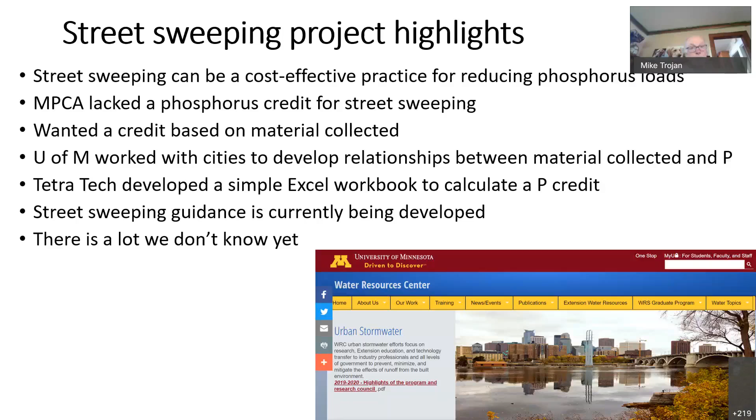So with that, I'm going to introduce Randy Neprash for a couple minutes. Randy is a PE, and he was a staff person for the Minnesota Cities Stormwater Coalition. He's recently stepped away from that so that he can do more work. He's a founder and currently a vice chair of the National Municipal Stormwater Alliance. It's an organization comprised of state and regional coalitions of MS4 permittees. He is also a stormwater regulatory specialist with Stantec.

So Carly, if we could pass, I'll stop sharing. If we could pass the ball to Randy and let Randy go. All right, Randy, you should be all set. Okay.

Excellent. Thanks, Mike. I'm Randy Neprash. I am coming to you from the Twin Cities in Minnesota. I am with Stantec, the Minnesota Cities Stormwater Coalition, and the National Municipal Stormwater Alliance. What's going to be talked about today and this work on street sweeping is potentially hugely important for MS4 permitted cities and other entities around the country. We're focused on phosphorus in this presentation and in this work. It's the nutrient we chase here in Minnesota.

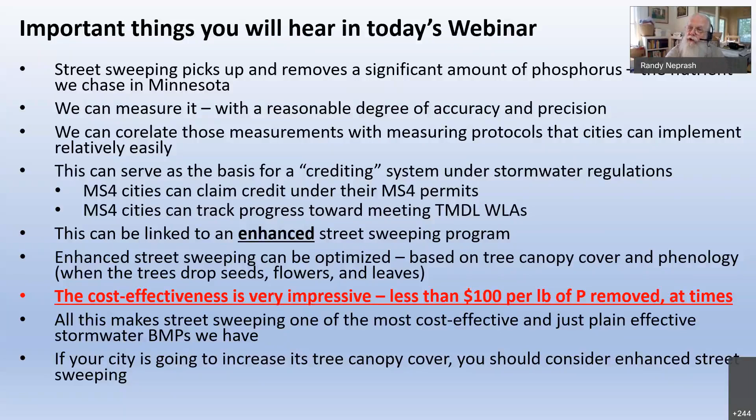The cost effectiveness here is really quite amazing. At certain times of the year, we're picking up phosphorus at less than $100 a pound, total cost. That's headline news. All of that makes street sweeping one of the most cost-effective and just plain effective stormwater BMPs we have. And if your city is going to increase its tree canopy cover, you need to consider this because you've got to address the increased phosphorus from more leaves.

So if you are an MS4 city, or if you're running an MS4 program, you should consider this for your city or your program. Have your state recognize this work and create a crediting program. You can incorporate street sweeping into your local stormwater program that makes stormwater funding available for buying street sweepers or operating street sweepers. You should get the tree canopy cover data for your city.

You should optimize your street sweeping routes. You should quantify the results and benefits from your sweeping work. And you can find all this information in the Minnesota Stormwater Manual. Can't recommend it more highly. Where there's going to be talk about the work that's left to be done, and it's considerable.

We should be looking next at street sweeping and trash instead of just nutrients. We should look at sweeping and solids. We should look at the impact of enhanced street sweeping on downstream stormwater BMPs, rain gardens, ponds, etc. We should be thinking of streets not as just sources of pollutants, but as useful collectors of pollutants where we can relatively easily pick them up and remove them. Then the next thing is we should look at all the other leaves that we have in our systems.

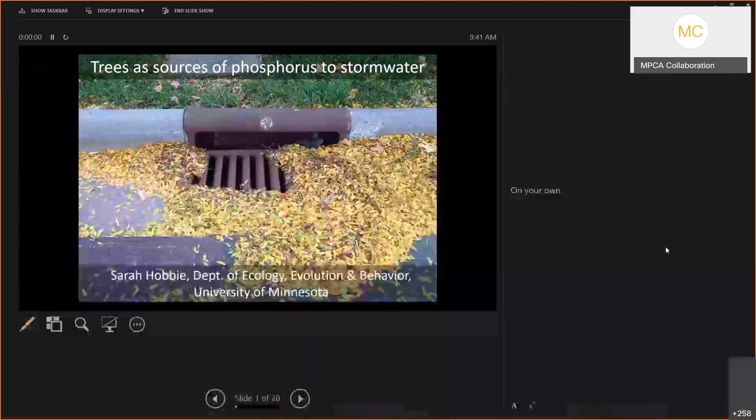All right, perfect. So Mike asked me to kind of set the stage today and talk about trees as sources of phosphorus to stormwater. Next slide. So I just wanted to remind people of the potential sources of phosphorus to streets and stormwater. Those include atmospheric deposition, which is mostly dust deposition for phosphorus. We can also get phosphorus coming into streets through erosion and overland flow. But what I'm going to focus on today is the role of trees in moving phosphorus into streets.

Next slide. So I'll first talk a little bit about just phosphorus in tree leaves and litter fall, and then I'll talk about litter fall contributions to phosphorus in street sweepings and some estimates that we've made of the contribution of litter fall phosphorus to stormwater phosphorus loading. And this is really, as I said, meant to set the stage for talking about the credit. Next.

So just a reminder that when plants drop their leaves in the fall, so when leaves change color, plants do this thing called resorption or retranslocation, where they reabsorb nutrients from the leaf before it falls. But for phosphorus and nitrogen, on average, plants only reabsorb about half of the phosphorus. And so what that means is that the leaves that drop into the street are quite nutrient rich. So both in phosphorus, but also in other nutrients like nitrogen.

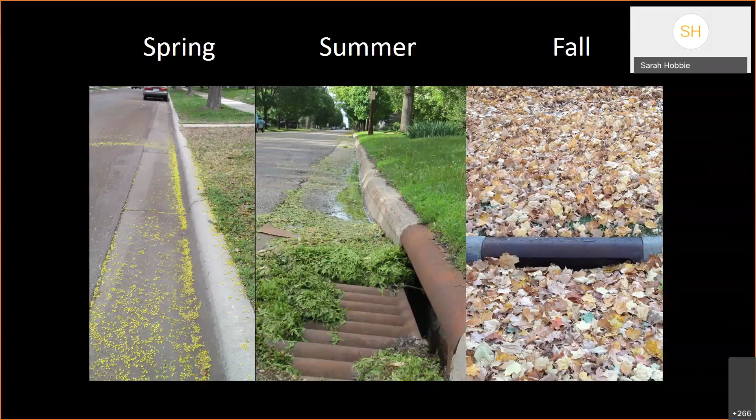So I want to talk a little bit about litter fall contributions to phosphorus and street sweepings. So next. So I'll describe a little bit about the street sweeping study that really has provided the data that are being used to develop the credit that the folks from Tetra Tech will be talking about. So this was funded by the Minnesota Stormwater Research Council. Next slide.

And what we did, as Mike mentioned, is we partnered with 5 different cities. So Prior Lake was a partner in a previous study, and then we added Forest Lake, Shoreview, Roseville, and Minneapolis to the study in 2019. Next slide. And so partnering with all of these cities allowed us to capture a range of street sweeping conditions. So a range of route types ranging from residential to downtown areas. We also had a range in canopy cover from basically no canopy cover all the way up to almost 40% canopy cover over the streets.

We had a range in frequencies of sweeping. We also had some variation in sweeper type. And for most of these studies, we were sweeping during the growing season, the warm season. I'll point out, because it's important later on, that in Prior Lake, we were able to do year-round sweeping and sweep at a really high frequency of every 2 weeks. So next slide, please.

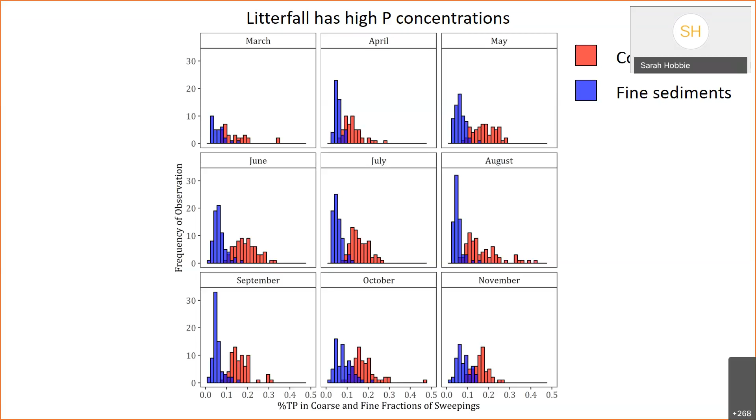And so this figure just shows for each month the distribution of phosphorus concentrations in fine sediments and in the coarse fraction materials that we collected from all of these different cities during our street sweeping study. And the main thing that I want you to notice is that at all times of year, the coarse material, which is primarily the litter fall that's coming in from trees, has higher concentrations of phosphorus than the fine sediments. And so this material, as we've been talking about, that's coming in from trees is very rich in phosphorus. Next slide, please.

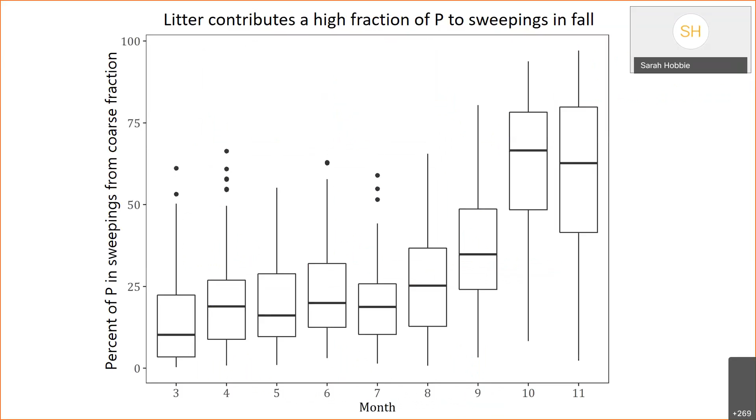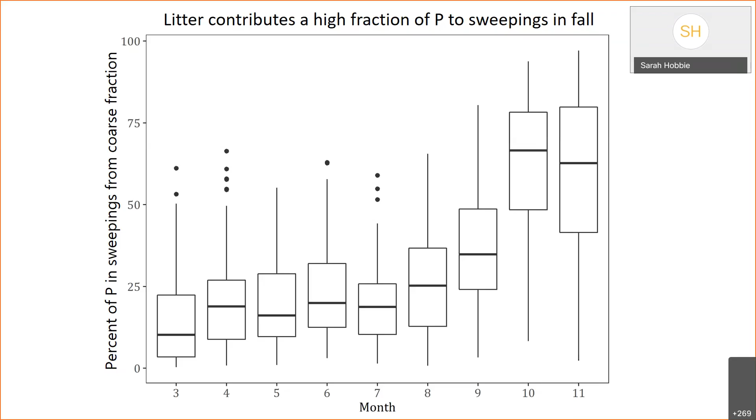And so if we look at the percentage of the phosphorus in street sweepings that's coming from this coarse fraction, you can see that that is variable over the course of the year. And it's particularly high in the fall months, especially in October and November, where we're seeing upwards of 70% of the phosphorus that is in the street sweepings coming from this coarse material or this litter fall. So this is good evidence that trees are really an important contribution of phosphorus to what's coming into the street. Next slide, please.

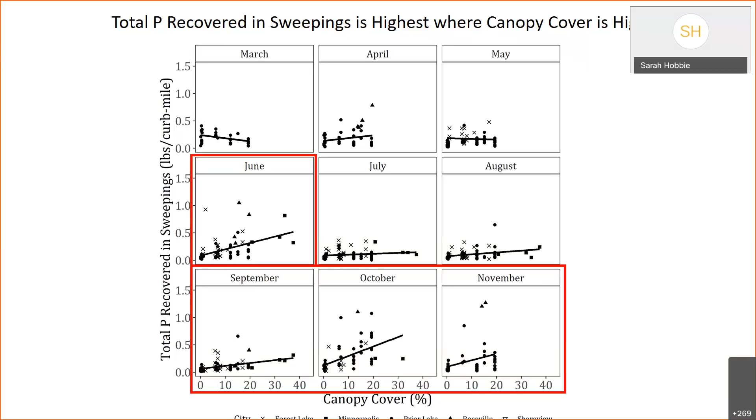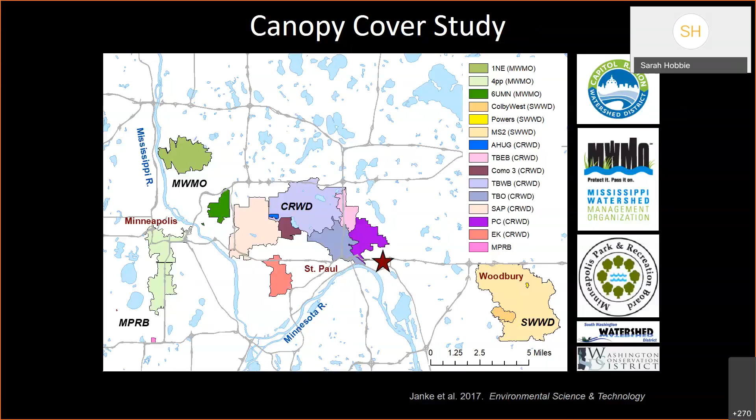So what is the evidence? We have further evidence then that litter fall phosphorus is contributing to stormwater phosphorus loading. So next slide. So I want to just show you some results from a study that was led by Ben Janke here at the U, where he was able to get stormwater phosphorus concentration and loading data from a number of watersheds around the Twin Cities metro, and I've included the partners on the right there who shared their data with us. We're extremely grateful to be able to analyze this rich data set of stormwater nutrient data. Next slide.

So we compared the average tree canopy over the streets in all of these watersheds where we were able to get stormwater nutrient concentration data. And you can see that the phosphorus concentration in stormwater is positively related to tree canopy over the streets, which is what we would expect if trees are contributing significant phosphorus to the street. Next slide, please.

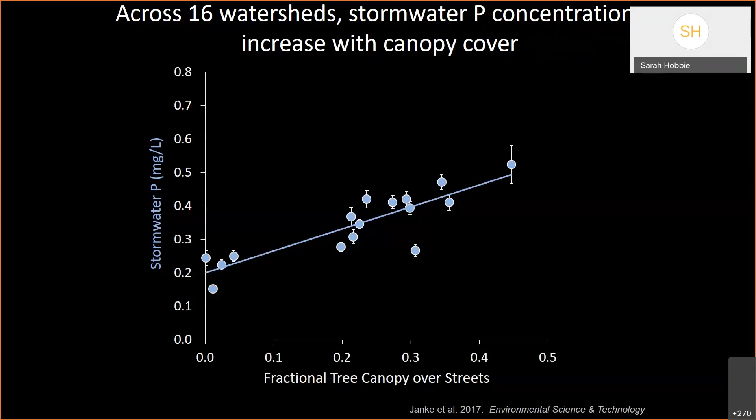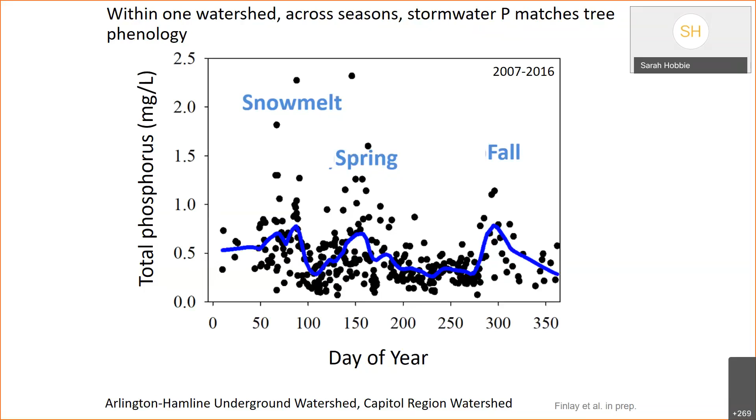And further evidence comes from looking within a watershed across the season. So these are data from a small residential watershed in St. Paul, and these are data that were collected by Capitol Region Watershed District. And you can see that this is almost 10 years of data, just looking at the average phosphorus concentrations in stormwater. So we see a peak associated with snowmelt, a time of year where we have a lot of runoff. And then we see another peak in the spring associated with that peak in litter fall that we see in the early summer. And then we see another peak in phosphorus concentrations in the fall associated with that peak leaf litter fall. Next slide, please.

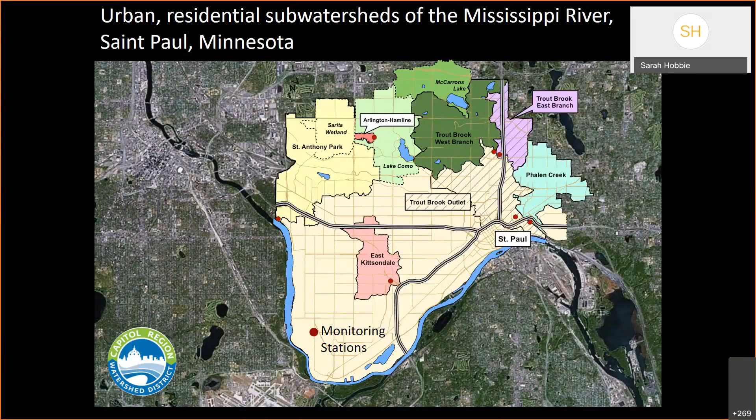And so we've done some sort of back of the envelope calculations to ask, well, how do litter fall phosphorus inputs to streets compare to stormwater runoff phosphorus yields? So next slide, please. So for these calculations, we narrowed in our focus on some watersheds that are monitored by Capitol Region Watershed District, where we were able to augment the data that they collect with our own data to get good annual estimates of stormwater phosphorus loading. Next slide. And then we were able to estimate the amount of phosphorus coming into the street in litter fall using our data from Prior Lake. So next slide.

So as I mentioned, for Prior Lake, we had really high resolution temporal data on street sweeping, where we were doing sweeping every 2 weeks over the course of 2 years. And so we could estimate from that the total annual amount of phosphorus that was coming into streets for some routes that varied in their tree canopy cover. And from that, we developed a relationship, just a linear relationship between canopy cover and the amount of material being collected by the street sweeper annually. And then we used a high resolution canopy cover map developed at the University of Minnesota for this region of St. Paul, where we have good annual stormwater phosphorus loading estimates, to basically map our estimates of litter fall into the street onto these watersheds. Next slide.

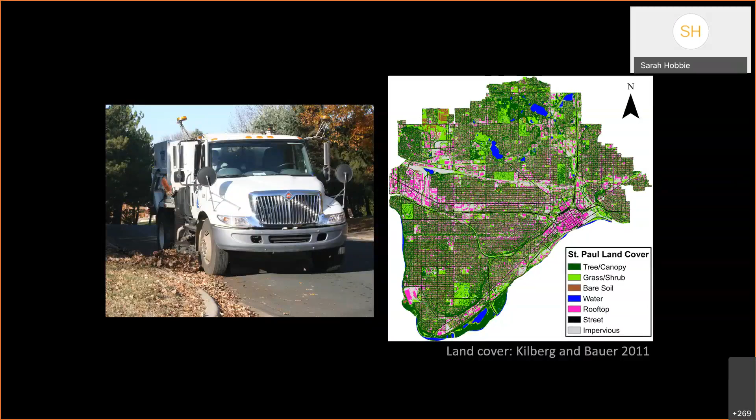And then we could compare the amount of litter fall coming into the street with the estimates of annual phosphorus loading in stormwater that we obtained using Capitol Region Watershed District monitoring data. Next slide.

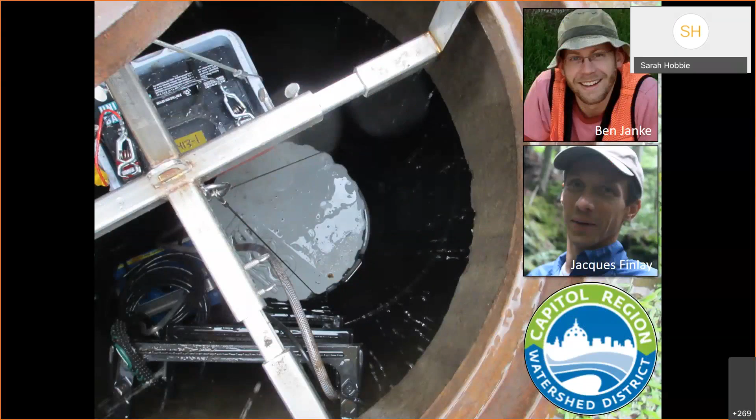So we estimate that the litter fall phosphorus into streets is equal to about 37 to 64% of what's being exported in stormwater. So a substantial contribution to stormwater phosphorus loading. Next slide, please.

So in conclusion, I hope I've convinced you that trees can contribute substantial bioavailable phosphorus to streets and stormwater. And the implications of this are that street sweeping should reduce stormwater phosphorus loading. So of course, the holy grail would be to implement an enhanced street sweeping program and demonstrate a reduction in stormwater phosphorus loading. And so fortunately, Bill Selbig has done that study, and he's going to be telling you about that in a little while. So next slide.

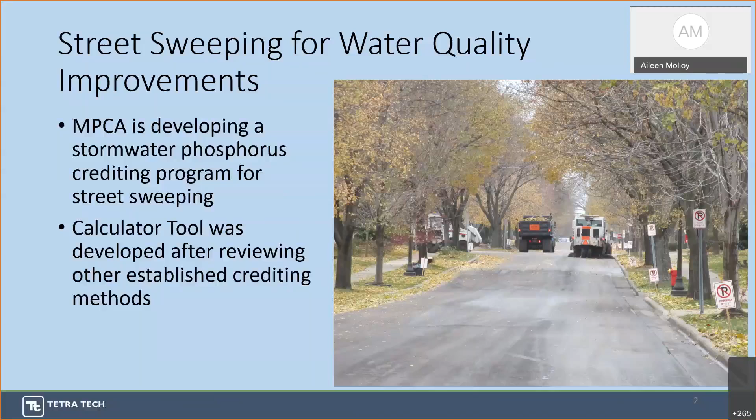And that's a model-based crediting approach. So for the Minnesota credit, MPCA wanted to develop an approach that's data-driven and encourages actual measurement rather than relying on default values. So prior to considering a specific approach, MPCA developed a survey to determine what proportion of municipalities are already sweeping, identify the general trends in sweeping technology and data collection, and gauge initial interest in having a street sweeping credit. And the results of that survey showed there's a strong interest in participating in a street sweeping phosphorus reduction crediting program. And most respondents said they are already collecting some level of data on the materials swept.

Based on the data that our team thought would be available, several crediting methods were considered, including direct measurement, surrogate measures, and modeling. And while the volume of street sweeping material was initially considered as a potential option, there was insufficient data to evaluate that relationship to phosphorus.

So as Sarah has already mentioned, the university conducted a study of phosphorus content in sweeper materials from 5 municipalities in the Minneapolis area. As she said, the street sweeper samples were collected from a variety of routes with different sweeping frequencies, sweeper types, and across all different seasons.

What they found was the strongest predictor of phosphorus concentrations was the organic matter content in the sweepings shown in these figures here. However, there were also clear trends noted in seasonal concentrations of phosphorus when the only metric used was the dry mass of material collected. In those instances, total phosphorus concentrations in October and November trended about twice as high as other months of the year. I just want to point out there is this regression equation here that will come into play when we get into the tool.

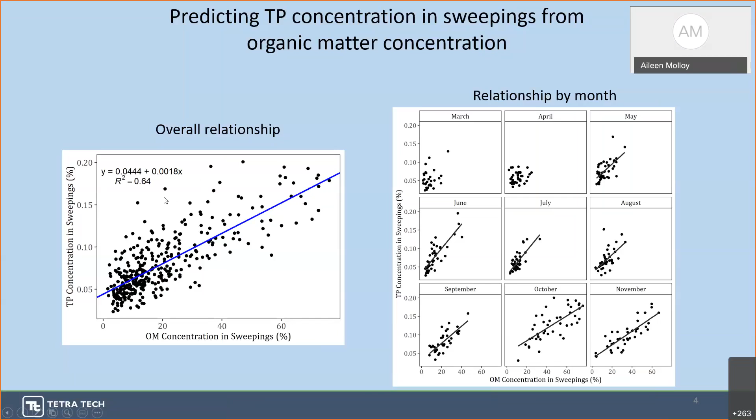So using the data from the university's study, we built a credit calculator tool. The tool is designed to be easy to use and provide a few options for crediting based on locally available data. There are 3 different options to calculate phosphorus reduction credits, and which one you choose is really based on the amount of data you have available. So the most preferred method involves the determination of the total dry mass of swept materials and a laboratory analysis to determine the organic matter content.

However, the other methods are provided for jurisdictions that are looking for maybe a less data-intensive approach. And so these other options include just providing the dry mass without an organic matter analysis, or providing the wet mass or the fresh mass of what's been collected, or providing the curb miles swept.

So option 3 is providing the curb miles swept, and that can be used if the only information you have is your curb miles. It requires the least amount of data, but it also has the most uncertainty about the actual amount of phosphorus removed. And so any credits using option 3 are extremely low and are based on the results of street sweeping modeling using the P8 model with the default values recommended by MPCA.

So selecting between these options is a relatively simple process. We have this flowchart that illustrates the path to selecting which crediting method is most appropriate. If you already have a sweeping program in place, you can use the flowchart to select the crediting method based on the information you have. If you're considering developing a street sweeping program, the data collection elements here can help guide you to better understand what you should be collecting in order to set yourself up for each option.

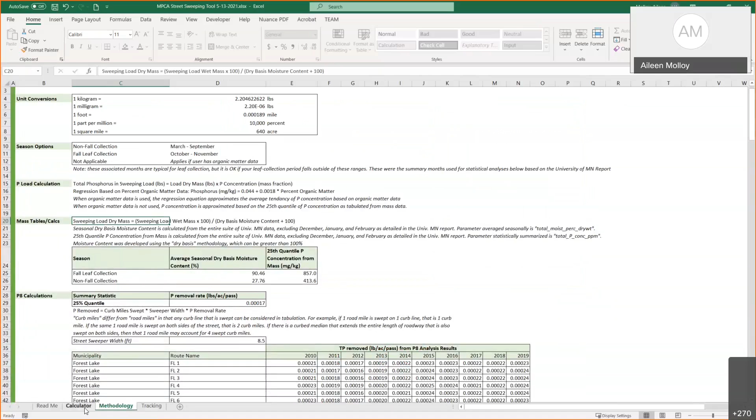Okay, so let's do another scenario. This time we're going to use data from Prior Lake. During the earlier study, the university collected sweeper data from Prior Lake. And as part of that project, the organic matter content of the samples was calculated. So we have a spring collection here in April, and 2,668 pounds of dry mass were swept. We also know the organic matter content is 17.5.

So we're going to add these to the calculator, making sure to adjust the season. Actually, in this situation, it doesn't matter. When you use the organic matter, you don't have to use the season. So you can put not applicable. And then we'll add our organic matter content. And as you see, once you pick not applicable because you're going to add organic matter, you will get a warning that there's missing data.

But once we add it, you can see your phosphorus concentration, and this is for the spring, is 755, which is much higher than the default of 414 for the non-leaf collection season. And now we have our phosphorus removed, 2.02, so we'll copy that over.

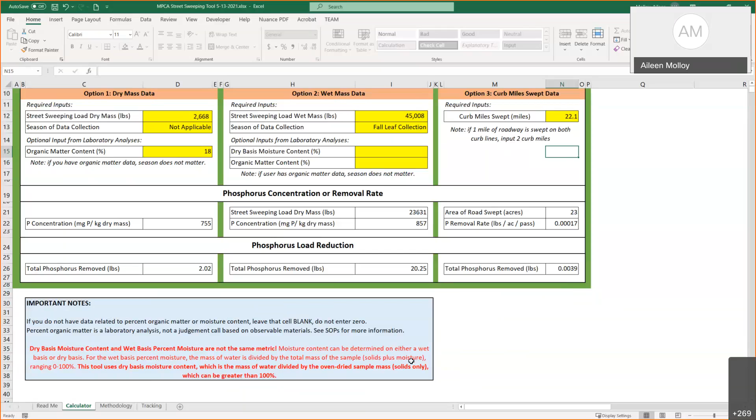So as long as you've captured the correct season or averaged out your moisture or your organic matter content, you can aggregate in any which way that works best for you, or you can add every route as an individual line item in your tracking sheet. That's really up to you. And then you'll have your total phosphorus removed for your reporting purposes. So that's really all there is to the phosphorus credit calculator.

The next steps on our end are developing some SOPs for sample collection and finishing up the user guide and developing some guidance on street sweeping for water quality benefits, which is what Hillary is going to talk to you about now.

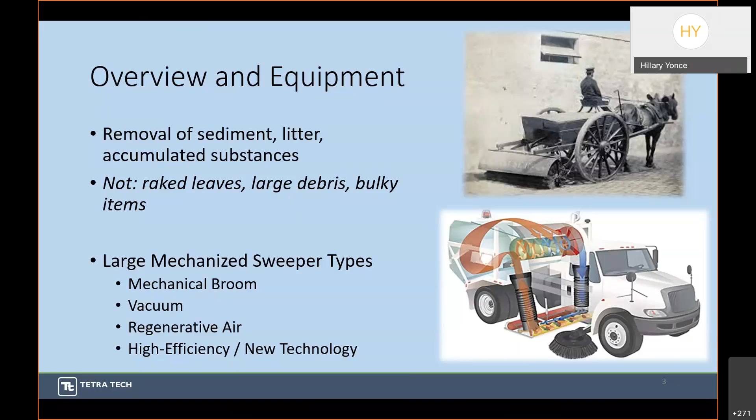And now the question that we'll cover next in the guidance is why do we sweep? So there are a lot of benefits to street sweeping. There's of course the improved aesthetics, meaning citizens are not seeing piles of sediment, trash, cigarette butts along roadways and curb lines and in roadside ditches and waterways. Sweeping also improves roadway safety. Accumulated sediment can be a real hazard for traction, even when you're thinking about bicyclists. And it can also obscure pavement markings.

One of the key focuses of us today, as people have talked about, is the quality of stormwater runoff from our roadways. So sweeping means less sediment, organic matter, particulate metals, trash, road winterizing and de-icing materials that end up getting washed off into our streams. So street sweeping results in waste that may be reused, which can be considered another benefit, and I'll talk a little bit about that later.

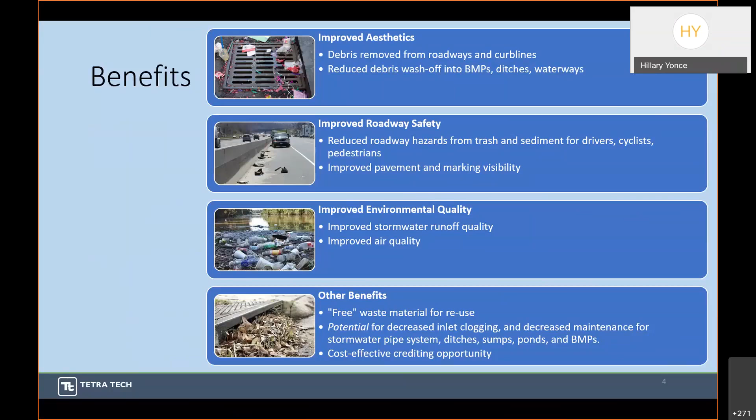It also has the potential for decreasing the frequency of maintenance on stormwater systems due to reduced clogging, but that's highly dependent on the frequency and timing of your sweeping, which I'll talk about later as well. It's also very cost effective, as people were mentioning, to remove phosphorus. So how do we get to see these benefits?

Another topic in the guidance is going to be about effectiveness, and effectiveness is highly dependent on timing. There are other important factors like sweeper type that I was just talking about, and the type of land use, the type of tree cover that you have; the amount of tree cover matters as to the amount of swept material that is going to be present in any particular area at any particular time. And that's why timing leads to peak program efficacy.

So an effective street sweeping program aims to perform sweeping activities prior to large storm events, when the potential for accumulated load interception from entering the storm drains is highest. Many municipalities sweep a couple times a year, which is great, particularly for getting those large leaf fall, flower fall, those visible organic matter related events. But every major storm that moves sediment and leaf litter and organics into your storm drain is a missed opportunity for potential phosphorus removal credit.

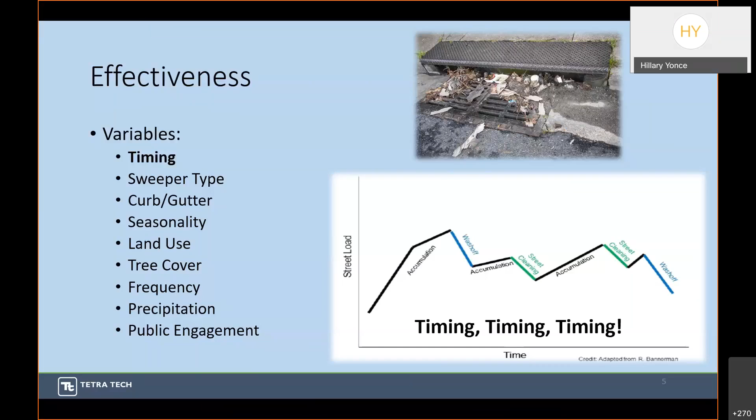So municipalities that already have sweeping have potentially a lot to gain by modifying programs for strategic timing, which is related to that enhanced street sweeping program idea. Okay, so you've swept. You've determined how much phosphorus credit you could gain. But what do you do with that sweeping waste? Most municipalities generally dump sweepings at landfills, which does have potential incurred costs.

And I saw someone pointed out in the chat that this suite of options that I've included here in the guidance is from the MPCA fact sheet on managing street sweepings. So there are other options that you can consider with your street sweeping waste, but it really depends on the specific goals of your municipality and the budget you're working with, etc. Most municipalities generally dump into landfills. However, there are opportunities for recycling, composting, and even reuse. But it does require sorting after the waste is collected.

So some of the options for reuse include winter road application, which may have implications for bringing that phosphorus back onto your roadways. Landfill daily cover is relatively common in some other areas, and even construction and development materials.

Okay, so street sweeping is beneficial, and a lot of us are already sweeping, but how much money does it really cost as a preventative measure for stormwater quality improvement? There are, of course, costs to consider related to buying machinery or contracting out the services to a private sweeping company. There's the cost of fuel. Some street sweepers run on CNG, some are electric, most are just typical fuel. There are also cost-related considerations for traffic control, operator training, things like that.

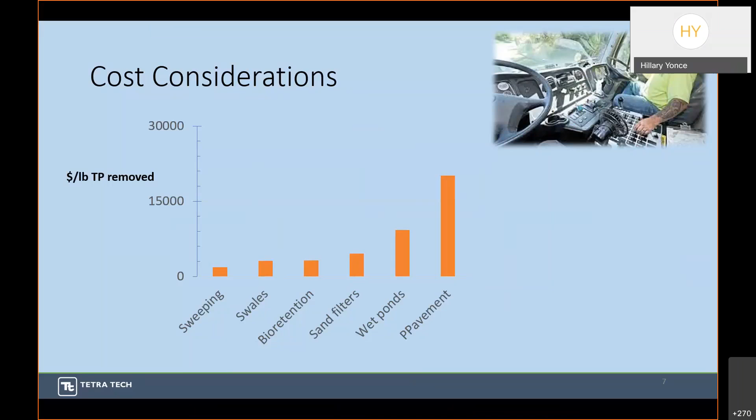Okay, so how can we improve, revamp, or develop a new street sweeping program? MPCA is offering a suite of tools at your disposal that are in the works. Aileen mentioned the standard operating procedures on how to collect the best data for credit, the credit calculator and user manual itself, and the guidance that I'm discussing here today. I also want to highlight one element about operator training that jumps out from the research that we've done. Operators are typically trained by sweeper machine suppliers.

They can also attend courses on operation and safety, but the LRRB, the Minnesota Local Road Research Board, found that efficiency of street sweeping is significantly enhanced when the machine operators understand why they are sweeping. So remember that your sweeper operators need to understand the program and the importance of their role in it, because then they will sweep more effectively.

And to use an example of a municipality that I will not name, that is not in Minnesota, a contracted street sweeping company that this municipality used for its residential streets did not alert residents when it would be sweeping, so no cars were ever moved prior to sweeping events. This meant that the street sweeper would sweep the road center line over and over again because it couldn't get to the curb line, but that's where we know accumulation occurs. So keep in mind too that just because your gutter may not look dirty, it may have particulate metals, organics, things that are not as visible as leaf litter and larger coarse materials.

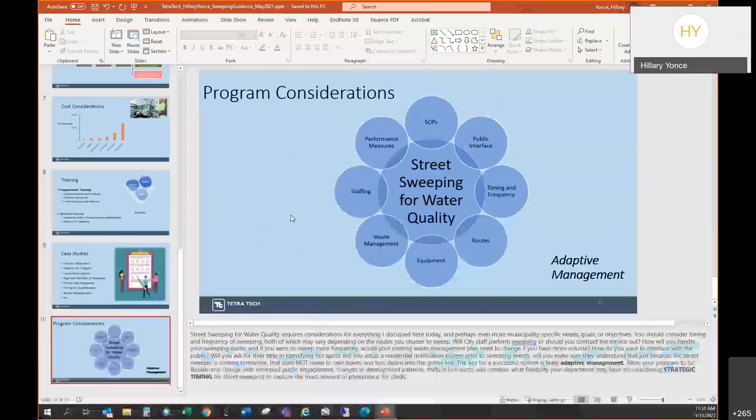Thank you, Hillary and Aileen. Carly, if you could pass the ball back to me for a bit. I feel like I'm in a basketball game here. I will share my screen here briefly.

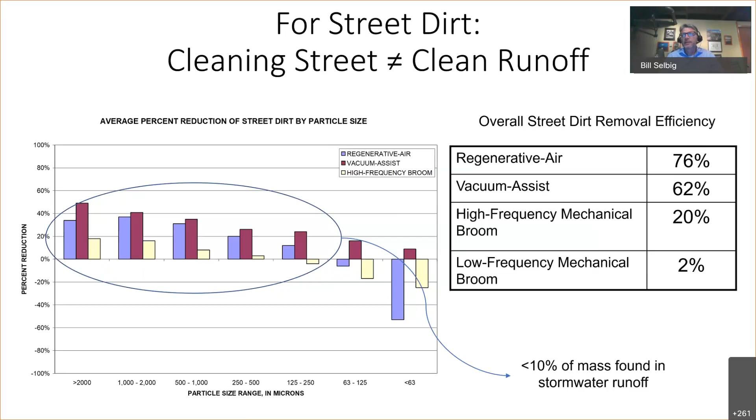Well, why is that? There are a number of reasons, but one of the primary reasons is that the particles that we see on the street, in particular those circled in the blue, the larger, coarser ones, greater than 125 micrometers, they just don't make it to the storm sewer. Their mass is too heavy, the specific density is too high. Maybe for some of the most intense storm events with a high precip intensity, you might move some of that. But the high distribution of coarse particles on the street resulted in approximately less than 10% of the mass that we found in the stormwater. So they just don't get there.

But that's not the end of the story. One of the reasons that we saw that particular result is because the study was done primarily in the summer. There was a reason we did it in the summer and we stopped in the fall, because with our street dirt sample collection method, as soon as we started getting a lot of leaves on the street surface, it really interfered with our sample collection method, made it much too time consuming. And so we decided, okay, we're just going to stop.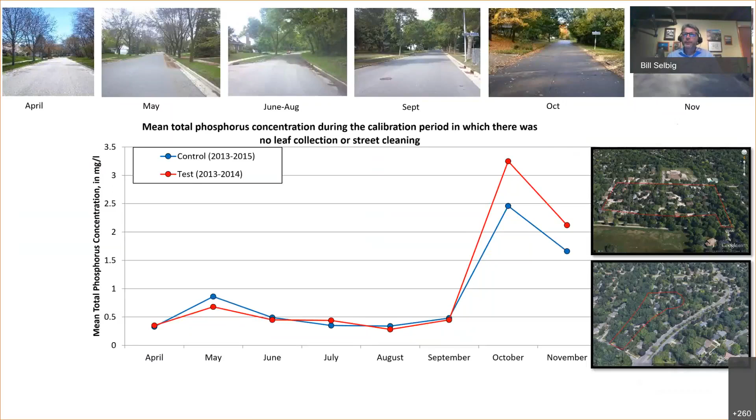So this was under a no leaf collection scenario, no street cleaning. We decided then to say, okay, well, let's take our best effort to mimic an actual municipal leaf management program. Now, what we decided to do is not actually being done by any municipality, simply because it's just too labor intensive. But the whole point was to keep the streets as clean as possible prior to a storm.

And that was our best upper maximal effort, because if we could not see any change in phosphorus concentrations by doing this type of action, there's no reason for us to continue the study, because any municipal action will also not produce any results. So here we are with leaf blowers right before a storm and measured the resulting phosphorus concentrations and loads at the end of the pipe.

And you can see by that new red dashed line added to the chart we've already looked at, the new phosphorus concentrations. And look at that, we are now down to near summertime levels for the entire period of October and November. So you brought down those concentrations quite dramatically. And this action in itself resulted in an 84% reduction in phosphorus loading. So that was quite dramatic.

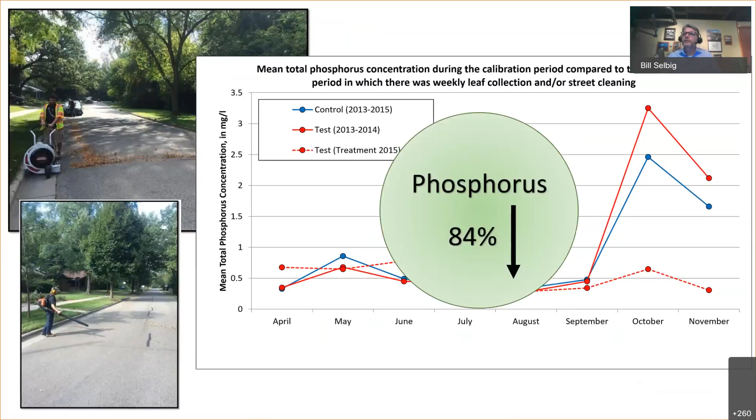And that was confidence that, yes, we most certainly see a decrease in phosphorus loading and concentrations if you keep the organic debris off the streets. So now let's move forward and start evaluating actual municipal practices. So this was us embarking on a 7-year journey that allowed us to step through various types of management options that are commonly used here in Wisconsin and most likely throughout the upper Midwest in general.

Don't worry yourself about all of the busyness going on with the axes labeling. Really what I want you to focus on here are the columns, the bars, the blue and the silver bars, representing total and dissolved phosphorus % reductions for each type of management practice. Now, each of these represents some combination of the photographs on the left. So we looked at a mechanical broom sweeper, we looked at a regenerative air street cleaner, and we looked at 2 different types of leaf collection.

These are collecting the leaf piles that are left in the terrace by the residents. And one would be what we call a transfer system, where you basically just push those piles into the street and then you move them into some awaiting collection vehicle and haul them away. And the other is a more sophisticated leaf collection mulching system, a vacuum mulcher. And then the other thing we varied is the frequency. So it's done either on a weekly basis or every other week.

But the bottom line for this particular chart is that you can see the gradation of % reduction in phosphorus loading given those different types of management practices. And they range anywhere from around 30% reduction all the way up to 65, 70% reduction. But what's really interesting here is how closely tied it is to the overhead street tree canopy. So the more tree canopy you have, the greater that reduction we noticed. Now that's just one variable. The other, of course, is how often you're out there doing it and what type of technology you're using.

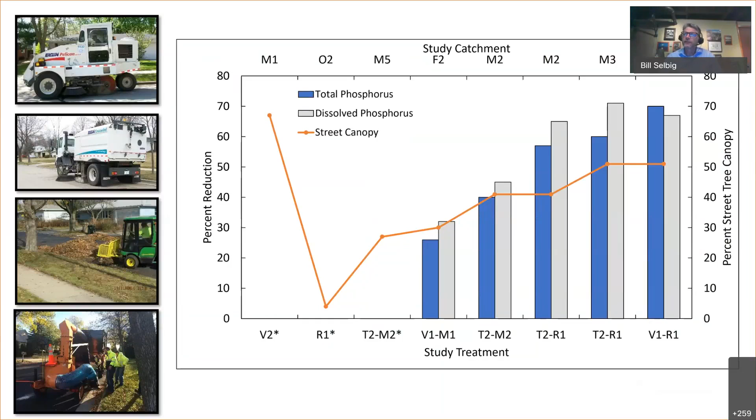So this tells us that the piles of leaves in the terrace don't mean as much as the leaves that end up in the street. And that kind of makes sense because it takes a little bit more effort for runoff to occur from those piles than it does for those that are already in the street. So the other thing that we've learned from this is that there is definitely a positive linear correlation between the amount of leaves on the street and the amount of phosphorus that we measure at the end of the pipe.

Here are 2 trend lines that we measured for 2 different study areas. And these are areas where we had weekly street cleaning. So this is relatively new leaves. Each week there's new leaves. And then if a storm moves through, we can measure the concentration and load of the phosphorus at the end of the pipe. And we can look back in time and say, here was the mass of leaves on the streets, all streets within our study catchment.

And then if we just take a look at the slope of those lines, we can get an estimate of the concentration of phosphorus per pound of leaf, which is great because this is now how you start to predict. You can start rolling this type of information into some predictive model that managers can use down the road and regulators can use to help managers come up with their TMDLs and permit requirements.

The problem here is that we have two different lines. The blue line represents a fairly high concentration in grams per pound, and the red line is a lower concentration. Well, why is that? What it tells us is that you cannot rely on just one single number. It's not transferable to all different types of residential areas. And keep in mind, each of these represents a complete medium density residential area that might have quite a diverse mixture of different street trees.

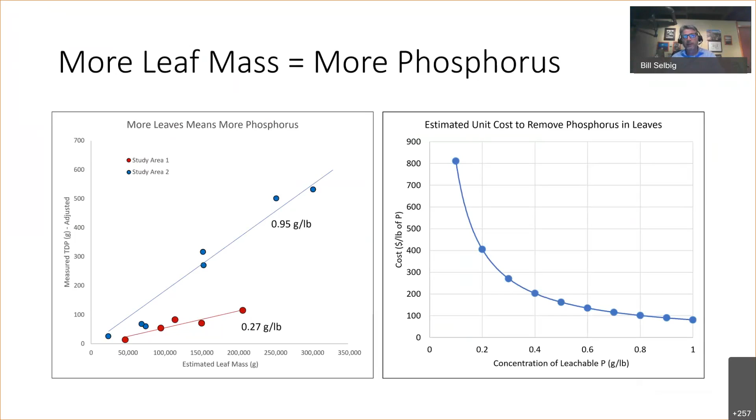So what we need to do is start picking these study areas apart by tree species and identifying where most of the concentration of phosphorus lies, and how it actually leaves the leaf, if you will, through exposure to runoff. There was some work by Ma and others in a paper that identified the top 10 street tree species throughout the country and broke it into regions. And in the Midwest region, you can see that it's fairly dominated by the Acer and Fraxinus genera, which are maples and ash trees.

And so we started an effort to take a look, in the laboratory, at the decay rate: how much phosphorus can be leached from these leaves in both their intact version and in a crushed version, since we know that vehicles and wheel traction can grind the leaves up. How much is leached out of the leaves over a 48-hour period?

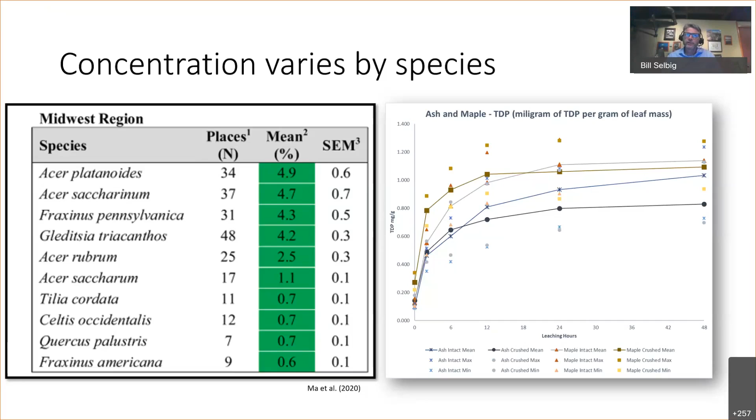And you can see that it's not linear. It doesn't happen all at once. It happens over a steady period of time. But this is now a function. It's a simple first order decay function that you can apply an equation to, which we can then, again, throw back into some sort of predictive model.

So in summary, here's what we know so far, and you've heard this from the previous speakers already. We know that leaves are a major source of phosphorus in the fall, and that the amount of phosphorus in that runoff is correlated to the amount of leaves in the street. Kind of makes sense. You have more leaves, you're going to have more phosphorus. You remove those leaves, you're going to have less phosphorus.

The things that we're starting to learn is that the concentration of the phosphorus varies by particular tree species, and we're learning as we move along here. We're in the early phases there. The frequency of the street cleaning and the leaf collection really is the driving factor. The more frequently you're out there, the fewer leaves there are going to be on the street, and therefore you're preparing for that next round of storm events, and it's going to result in less phosphorus being leached. Bottom line here is the cleaner the streets, the less phosphorus you're going to have.

And then I'm just going to throw this out, as food for thought: it isn't so important how you collect the leaf piles. I don't think you can just leave them, but the way in which you collect those does not necessarily matter as much as the way in which you sweep the street. That is really what should be focused on here. So that's what we know. But now I'm going to talk a couple of slides on what we're still learning.

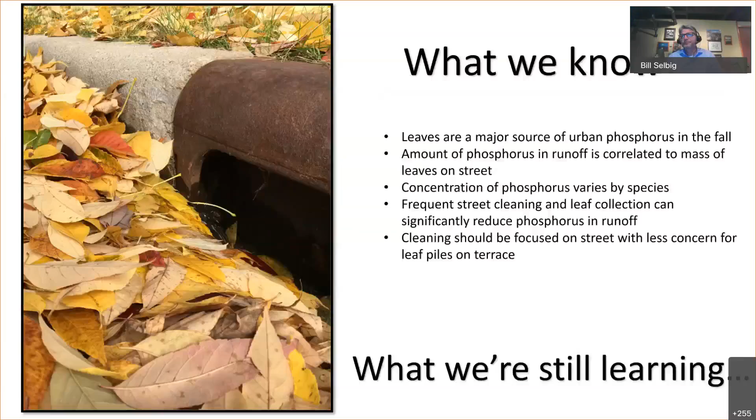Well, for one, I mentioned this idea of identifying how phosphorus leaches from leaves of individual tree species. There was a paper written by John Dorney back in the late 80s that attempted to do this. When we first stumbled across this, I was very excited because I thought that was the answer. But as we started doing our own experiments, we quickly realized that they are not similar. Looking more at the Dorney paper, he took different species, put them in a container of water and swirled it around for a couple of hours, and that was the answer.

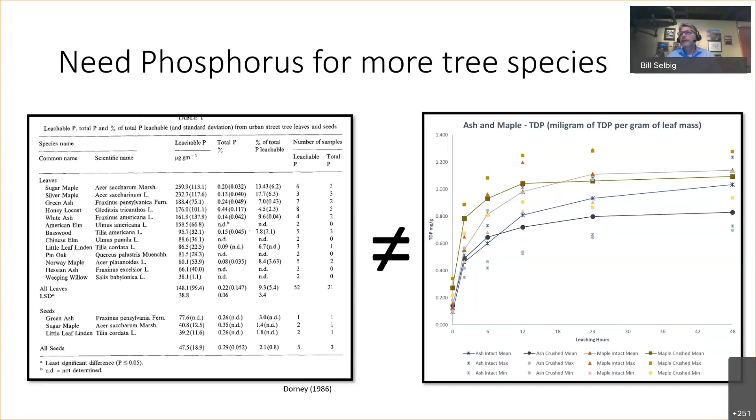Well, if we take a look at the chart on the right, where we extended that 2-hour experiment over 48 hours, you can see that after only 2 hours, that's only part of the story. There's much, much more phosphorus that's available for leaching. So the longer those leaves sit out there without being collected, the more they're going to be exposed to rainfall events, and the more phosphorus will be leached. It will be less and less each time, but new leaves will fall on top of old leaves, and it ends up being a compounding effect.

So we need to start expanding on this list of the top 10 street trees in the Midwest, and we need to create similar curves for all of these species. But that's just the Midwest. There are other regions throughout the country that do not share the same type of street trees. So eventually there needs to be a fairly comprehensive list of primary tree species for which these curves are developed.

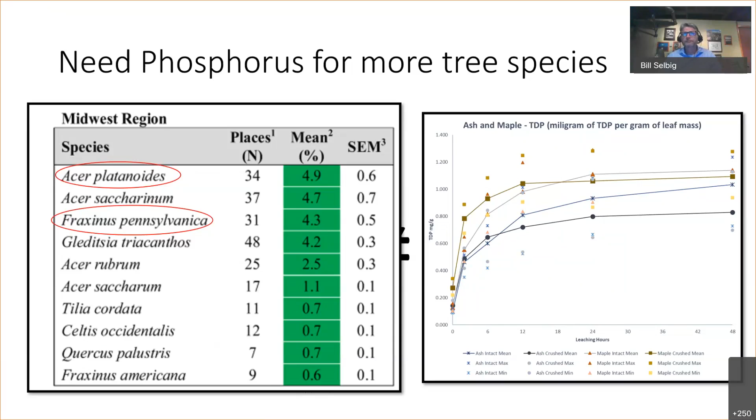Then once we have this information, how do we use it? You've already heard the presentation by the Tetra Tech folks on the Excel model. That is certainly one excellent way to go about estimating the amount of phosphorus you're removing just by simple collection of what's in the hopper. But there are other methods that might be a little more sophisticated, and I don't know if we're there yet, but ideally we'd like to be able to predict the amount of phosphorus you're going to see at the end of the pipe based on watershed characteristics and management efforts.

One of these that we're working on right now is the use of regression models. As I showed you before, we clearly see a positive correlation between leaf mass on the street and end-of-pipe phosphorus loads. When we add in all the other variables of the watershed, the one predictive variable that rises to the surface is leaf mass. The problem is we don't know how to effectively predict when leaves are going to fall. Not saying it can't be done, we just haven't gotten there yet. So it's a bit of a dead end at this point. But maybe there are other ways we can work around that.

One of those is the use of a model called WinSLAMM, which is used extensively here in Wisconsin, and I think quite extensively in Minnesota as well. WinSLAMM already has a routine designed for street cleaning, but it focuses on street dirt itself and the pollutants attached to the dirt. But I think it could be easily modified to include what we've learned about leaf collection and the amount of phosphorus in organic leaf litter.

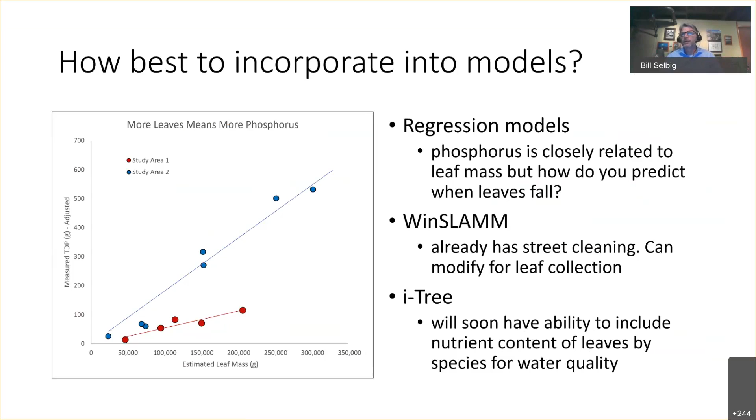And finally, there's some new work being done by the folks at the U.S. Forest Service with their i-Tree model. They have a module called i-Tree Species, which accounts for a number of different ecosystem services offered by trees, shading and habitat and whatnot. One of the things they're considering adding is a water quality component. As cities remove ash trees because of infestation of the emerald ash borer, what do we replace them with? Here's an opportunity for a model to consider all of the aspects of new tree species, including low phosphorus content in the leaves. This is ongoing work, and we hope to have some really interesting results in the next couple of years.

And then finally, I just wanted to introduce this idea of how leaf management and street cleaning really influence downstream BMP performance. There's been this notion of double dipping, which is primarily a modeling relic, where if you have a string of BMPs in your model, each is assigned its own performance, its own efficiency, how much pollutant is reduced by a certain BMP, but then it travels down the treatment train to the next BMP, and that BMP is assigned its own performance.

But if through leaf collection and street cleaning, you are able to reduce the amount of available phosphorus in the first place, how does that influence, let's say, a wet detention pond where runoff flows in there? Because now you may have less phosphorus entering the pond. It may ultimately lose its efficiency. Not that it's working any differently.

It's just that you once had a very high concentration coming in and a low concentration leaving. But now that very high concentration coming in has been reduced. It's been cut in half, let's say, just because you have an effective street cleaning and leaf management program. It then makes it appear as though that wet pond isn't working as well. So these are the types of things that need to be sorted out: how does this upstream management effort, if you will, affect downstream management efforts.